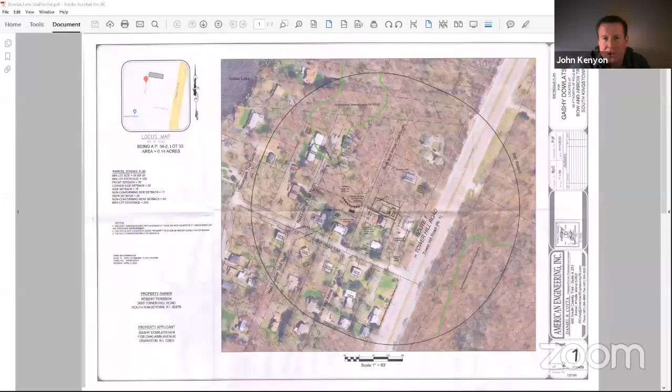It's designated as tax assessors plat 34-2, lot 33. The property is 6,050 square feet in size, and it's in the R20 zoning district. The applicant is proposing a 2-bedroom, single-family residence with an 896 square foot footprint. The proposed house meets all the setback requirements and no dimensional relief is required. The house will be serviced by a proposed OWTS that has been approved by RIDEM. There are no wetlands on the property, but there are some located to the northwest of the lot. The wetlands have been flagged by NRS, and the proposed OWTS will be located to the rear of the property, approximately 115 feet from the wetland edge.

We're here tonight for a recommendation under section 504.1 of the zoning ordinance, as the OWTS is within 150 feet of the wetland, requiring a special use permit. The proposal meets all the requirements under section 504, including the lot coverage requirement of 15%, and the drainage has been designed for the 25-year storm. Patrick Freeman from American Engineering is here tonight; he prepared the plans. I'm going to have him go over the existing conditions and the proposed OWTS. Thank you, John. Mr. Freeman is just coming in.

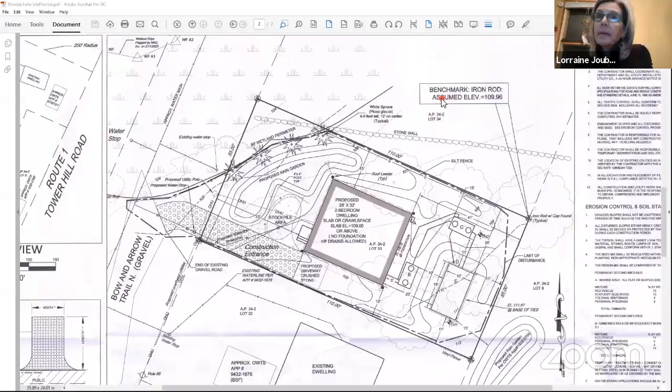It obviously would be up to Gashy. If he wanted to put a fence up, he could, if that's what you want. I think the posts are sufficient if they're very clear and there's also a sign with it. Okay, but maybe the other members have a comment on that.

One comment: I didn't see any test pit locations. What sort of statistics did you get from the pits? Where are we with the water table? That's something else I would like to see.

Sure. Test hole 1, do I still have the cursor? The test hole 1 is right here. That's the symbol that we use for the test holes. Test hole 2 is in that location. If you scroll down, we have the test hole and percolation data just below the scale. So test hole 1, we got a seasonal high water table at 19 inches. Test hole 2 was a seasonal high water table at 18 inches. Okay.

And are you planning on having the driveway be pervious? And if so... Okay. Yep.

Does anyone have any further questions of the applicant?

Just one other question about the erosion sediment control plan. According to the current stormwater erosion control manual, as well as the DEM stormwater standards, the infiltration areas such as the BSF and rain garden should be protected from construction. Does your erosion control plan specify protecting those areas by fencing before construction begins?

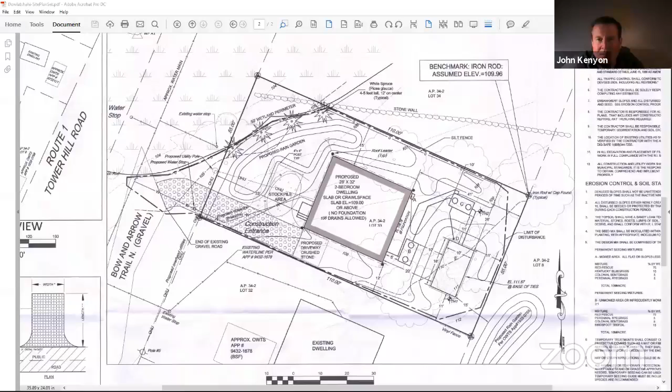It seems that so far we haven't really addressed one of the key issues of the flooding that occurs where a car could get stuck, either going to or coming from the new dwelling. Patrick, can you suggest any solutions to that? I can envision a scenario where an emergency vehicle has to visit the house and treat someone and they can't get there or can't get out. Sure, the crushed stone driveway we're proposing wouldn't pose that issue.

As far as the end of Bow and Arrow Trail being impassable, I wouldn't think that based on what we have, I don't have any evidence it would be impassable. Even though it's flooded to the water stop? I'm sorry? Even though it's flooded to the water stop? Well, I'm not sure which water stop we're talking about, the one in the 50-foot perimeter wetland or the one in front of the Bissett's lot.

I'd have to double check, I don't have an answer for that. The only thing we could do is improve the gravel of Bow and Arrow Trail to meet a standard where it won't be a flooding hazard.

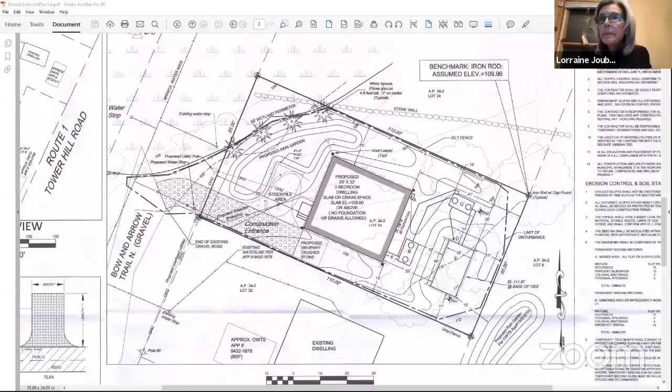Any thoughts? Yeah, John and Jane, does the existing gravel end perpendicularly to the road, or is it almost a diagonal?

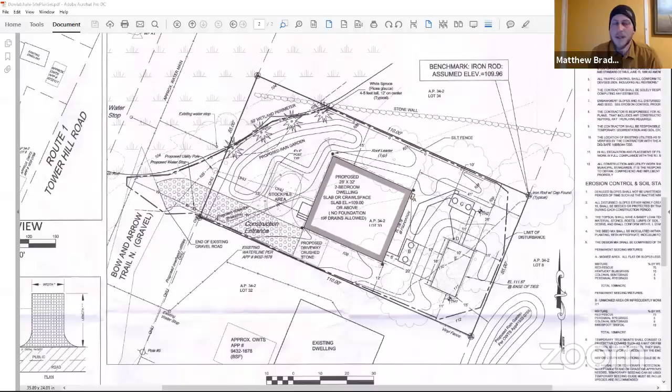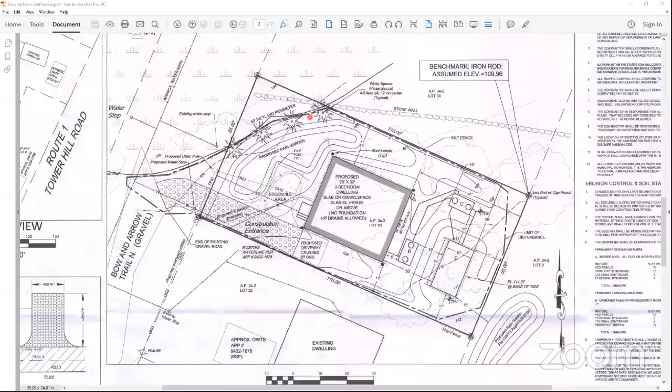It is kind of a diagonal at the water stop. I did send a couple of pictures to Mr. Parker, titled flooding 1 and flooding 2 or something, for Bow and Arrow Trail North, and it pretty much shows what happens.

So right where you see the little sign on the right in the light pole, that's where our water stop is, and you can see that the gravel pretty much ends right there. And the property line is actually past that forked tree on the right.

I think there's another one that shows a little bit more of a close-up, it's runoff 2. You can see that it's not only flooded by the runoff coming down the trail, but also it's pretty wet off to the right coming off lot 33.

That's where everybody gets stuck. One fella came down with a box truck because he was following his GPS - it reminded me of a Seinfeld episode - it told him to go straight into the swamp, and that's what he did. He had to be towed out. Like I said, the guy doing the surveying was parked right there, and he had to be towed out too. It wasn't even raining at the time.

It just gets really soaked. It's fine in the summertime, but not during the other six months. So I just think the picture tells a story. You can see where the end of the gravel is, which is adjacent to the water stop.

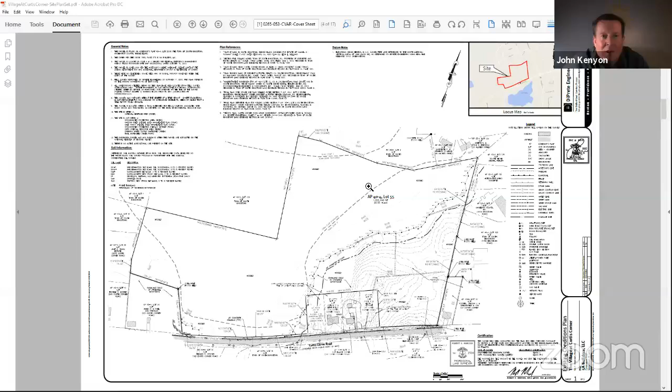There'd be one affordable unit in each of the 8 two-family dwellings. The concept is for a young couple with a family that could buy the two-family, live in one of the units, and then rent one of the other units as affordable.

We appeared before you last year during the master plan stage of review, and you didn't provide a recommendation because at the time you didn't feel there was sufficient information to give a recommendation on. We did receive master plan approval in March of last year.

Under the subdivision process, after we receive master plan approval, we then apply to the state for all necessary approvals, and then we have a preliminary plan public hearing with the planning board. We've had one hearing so far. They requested that we come back to you since we have more detailed engineering along with the landscaping plans.

We've also filed for the necessary state approvals. They're very close to receiving those, and not much has changed as far as the design since the master plan. Eric Prive from DiPrete Engineering is the project engineer. I'm going to have him briefly go over the existing conditions, the changes from the master plan, and where we are with the state permitting.

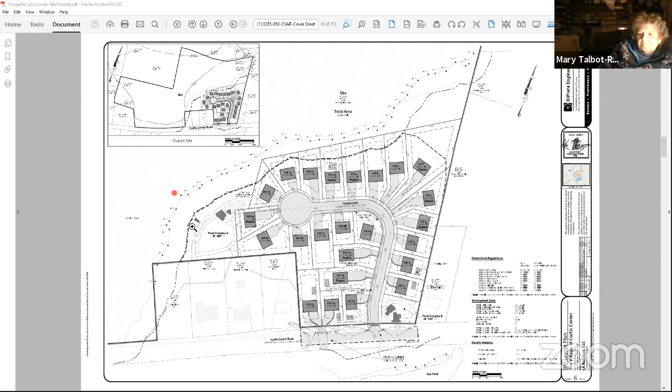Unfortunately, Eric has to be at another public hearing in another town, so he's going to talk really fast. I won't go too fast. First of all, can everybody hear me okay? Yep, thank you. For the record, Eric Prive, P-R-I-V as in Victor E, a registered professional engineer with DiPrete Engineering.

To give you a quick overview, not much has changed from master plan. What we were able to do, one of the things we looked at during the public hearing process, was that one of the abutters located just to the east had some concerns about drainage. So we increased this area in the front from the original master plan. The master plan had a smaller area coming to this front area for infiltrating groundwater.

So we actually were able to shift the units up a little bit. We shifted them all up to the north here, and we were able to create a larger area up here to be able to treat that stormwater.

Also, there's an existing catch basin located right here in Curtis Corner Road, and that catch basin actually just goes to a flared end that comes into a roadside ditch here. There's no treatment, it just goes from the catch basin into the roadside ditch. So as part of our development, we're able to take that, and we have the roadside ditch here, but then it actually now overflows and comes in and gets treated within our water quality area over here. We have a sand filter located right here in the front.

So it's a stormwater sand filter, not the bottomless sand filter like the septic system you were talking about, just the sand filter for stormwater in the front. So we're actually treating a portion of the roadway that is not currently being treated today. It was just direct discharge into this roadside swale here as well.

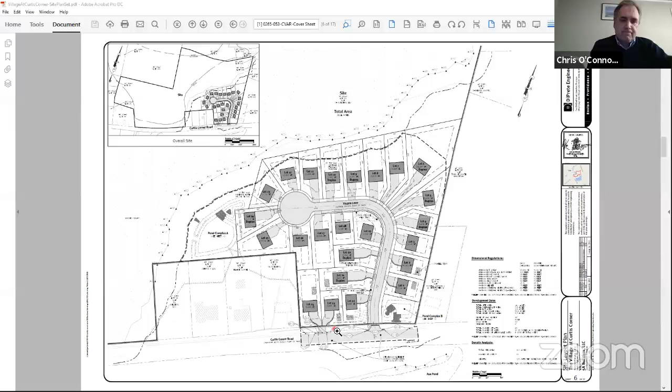Eric, is there a requirement for protection of upland open space in this zoning district? Because it seems awfully dense for the amount of development on a relatively small area of suitable land. So, no, there is not, but because it is a comprehensive permit, we had laid these out back at master plan, each lot size and the relief needed. What we did was take the town's comprehensive plan and the underlying densities. This area is known as medium high density, which allows 4.35 per acre.

So that's effectively a 10,000 square foot lot. We took only the upland area, so there's 7.4 acres of upland, and that's what the density was driven off of—staying within the town's comprehensive plan and restructuring it for density purposes. There are some areas for stormwater measures, but we only used the upland area. That's not a requirement of the density, but that's what we used to come across. It'd be difficult to build in the wetland.

My second thought is that there is no indication that any type of innovative low impact development is occurring in terms of design and the extent of pavement. The driveways are extremely wide—the guidelines are 9 feet wide with a broadening as you approach the house, not immediately. The cul-de-sac doesn't look like it's going to have vegetation in the middle, and that's a pretty large cul-de-sac. It could be vegetated. There could be shared driveways, particularly lot 24 and 23, where for safety concerns it narrows to one, but it's still two very large, very wide driveways. Lots 20 and 21, and many others, are almost all excessively wide. Is there any effort to reduce impervious cover?

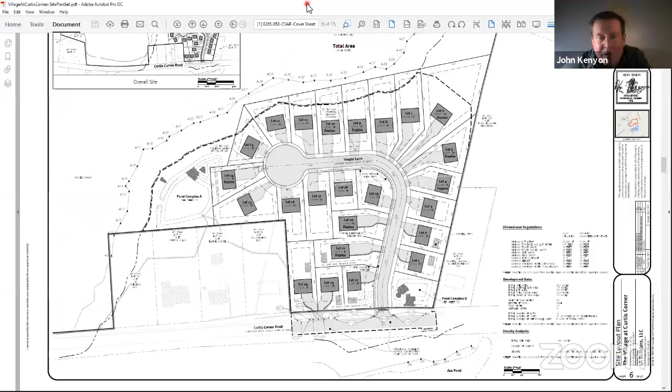Well, I'd note that the concept behind this is being close to the core of town—there are recreational areas you can walk to. I'd agree if we were on the outskirts with a larger parcel, but the town needs affordable housing, and this is one of the few lots in town that works for this type of development. There's not many left like this. If we start reducing the number of lots, we're reducing the affordable housing, and that's the whole concept with this development.

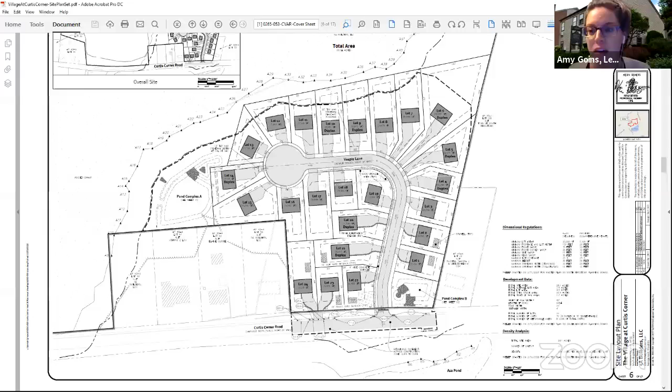This is Amy Goins. May I jump in? Hi everyone, I'm sorry I haven't met some of you in person. I think this is actually my first Conservation Commission meeting, so I've been listening. I just want to jump in on this one question of density.

This is an advisory opinion to the planning board. We're at the preliminary plan stage now. That means they're vested for density, right? The density vesting occurs at the master plan stage. Doesn't mean it's set in stone forever, but it means that the approved density is what will govern going forward unless the engineering produced at the subsequent plan review stage shows that the land can't support the approved density.

So I would encourage you in your discussion and your recommendation to the planning board to consider that. And if you have recommendations on conditions that will mitigate the impact of the approved vested density, you should certainly feel free to propose those. But I want to caution you against that, and I've provided this advice to the planning board as well. You know, master plan density, that ship has sailed for the most part.

Thank you. This is an advisory. Go ahead, sorry.

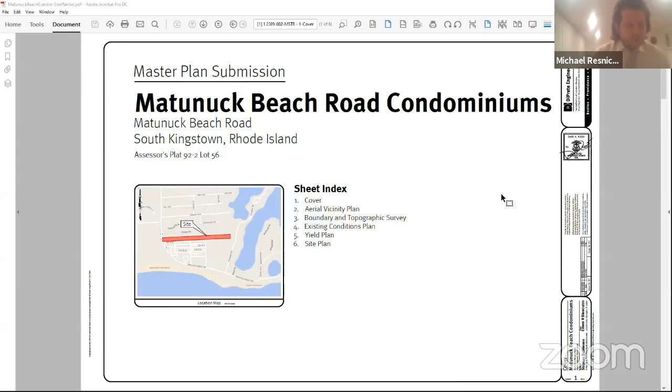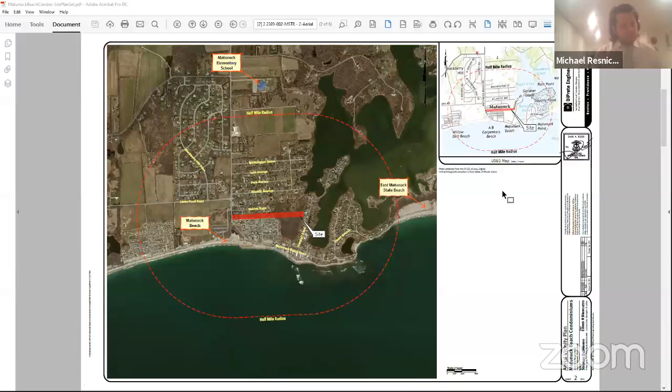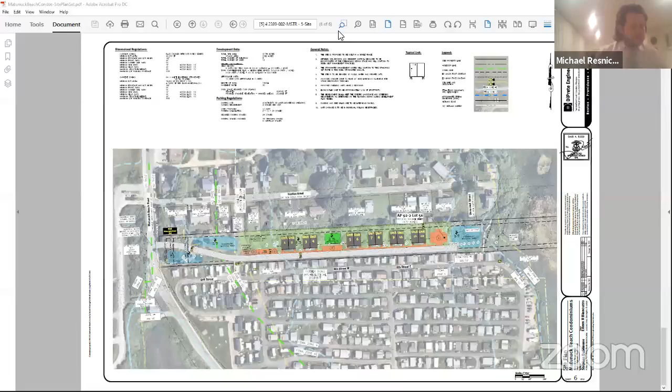The property is located at Matunuck Beach Road, plat 92-2, lot 56. The parcel is 4.77 acres, and it's in a mixed zone, CN and R20. By way of background, we have completed our pre-application concept review before the Planning Board and the Tech Review Committee, and we are presently before the Planning Board on our conceptual master plan review. We have had two lengthy hearings before the board on this present application.

I would estimate anywhere between 7 to 8 hours of public comment, question and answering, and presentation before the board, and we are presently scheduled for a meeting before the planning board on January 7th of this week. The commission is aware we still have before us our application for a preliminary plan and also final plan. I'd remind the commission that, like the previous applicant and presentation, this is a comprehensive permit pursuant to state law for low to medium income housing. The proposal right now is a 12-unit residential condominium complex in the form of 6 duplex structures, as depicted on the site plan in front of you. Access is proposed via private driveway with the parcel's lot frontage located on Matunuck Beach Road.

As Mr. Duhamel will discuss with you, we've proposed to manage the stormwater through the installation of various features on the eastern and western portion of the site. The development is proposed to be serviced by public water, and originally it was to be a single community on-site wastewater treatment system to serve these 12 units. However, based on commentary from the planning board as well as the public, that's been changed to 6 units, 1 unit to serve each of the structures. And again, this is a comprehensive permit application, so 25% of these units, 3 units, will be deed restricted as low to moderate income housing.

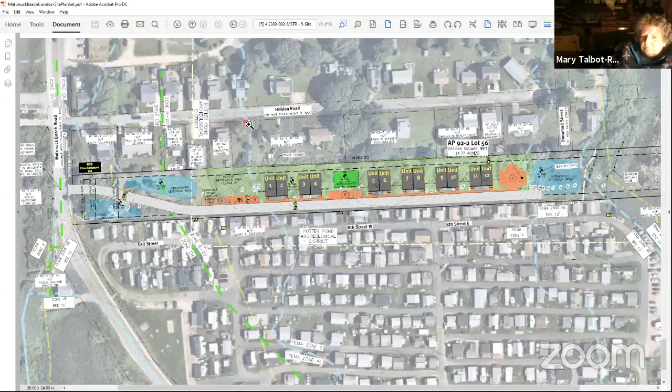We've been successful with pervious pavement in commercial and residential applications. In this coastal application, we were concerned with sand flying everywhere, so you would have much more maintenance of sweeping and vacuuming the sand. That's why we felt an impervious road with open concrete pavers would be the best use within this area. Having a full gravel road, I think, is more maintenance and more difficult to maneuver in.

It's only 20 feet wide, so having full access of that 20 feet is more guaranteed with pervious pavement. Impervious - well, yeah, it's overall impervious. Right, I don't know if I answered your question. I'm not sure, thank you.

Are there any particular restrictions with it being in the Potter Pond Archaeological District? Are there any restrictions posed on the project? Which district? It looks like it's in the Potter Pond Archaeological District - does that impose any limitations on your development? We submitted to Rhode Island HPHC, Historic Preservation, and they found no historic reason to prohibit construction.

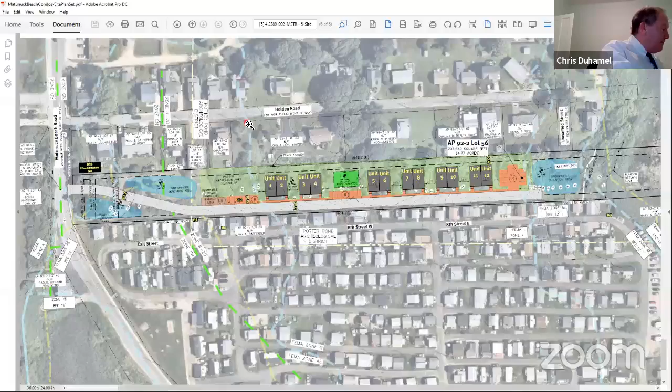And with that, it's more conducive to an individual sewage disposal system. It's a condominium, an association - it would still have one entity responsible for oversight and maintenance of all the units, even though there'll be 6 instead of 1. So that high level of scrutiny or maintenance will still exist, but it allows for about 100 feet less road and the parking reconfigured, giving greater separation to the wetlands and less disturbance. It also meets a concern raised by the planning board about what happens if one system were to fail - we'll have limited that.

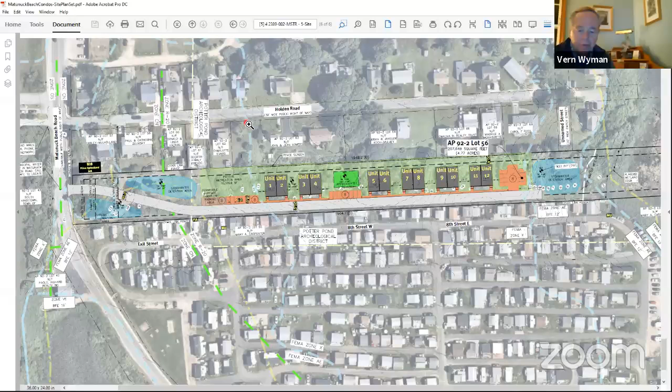Would it also modestly limit the proximity of the outermost units to that flood margin showing there? Well, we're pulling it away from the east side for a better separation, so certainly within that area, yes.

Jay, is there anybody else present with a hand raised? No, there is currently one attendee, Tori DeSimone. Tori, if you have anything you would like to share or say, please raise your hand. We'll allow you to speak.

I think that's Steve DeSimone. I believe that's Stephen, yeah. But Stephen was logged in already. Okay, yeah, Stephen's logged in. I am logged in. That's my mother.

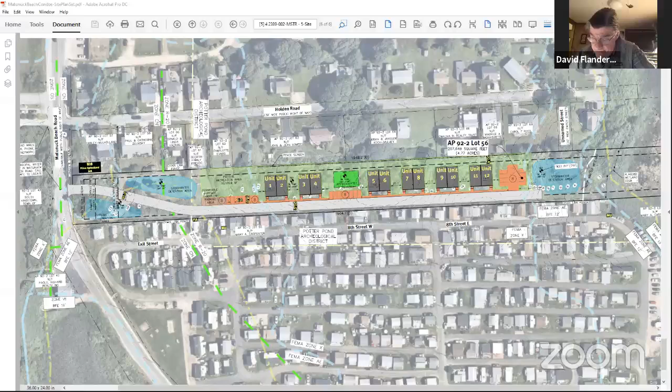So no, I do not believe there's anyone else in the public that wishes to speak at this time. Does anybody else on the commission have any further questions with the applicant?

If not, I'd entertain a motion for the recommendation to the planning board. I'll make a motion for a recommendation. It appears that the applicant has taken into account the planning board's concerns and reconfigured the subdivision to address those issues, including using 2 separate OWTS drain fields rather than 1 - pardon me, 6 of them, 1 for every 2 units. Although we really don't know the exact placement yet.

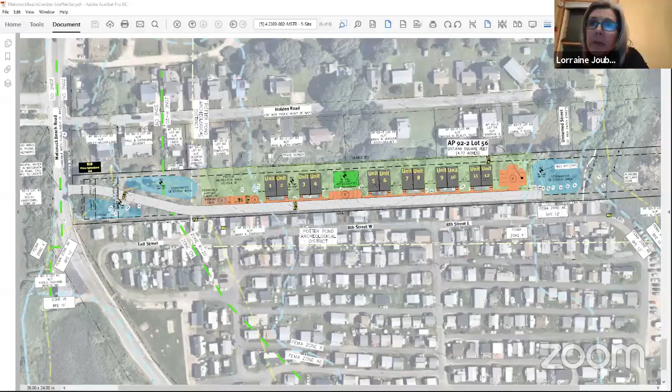In terms of stormwater management, given the permeable soils, there are no issues with infiltrating most of the runoff. The primary concern appears to be potential flooding, with more frequent and more severe floods, especially in terms of leaving the site in an emergency. So it would be useful if the applicant could evaluate the scenarios developed in different mapping programs out there to evaluate what the future flooding could be over the next 30 years at least.

Lorraine has made a motion. Do I hear a second? I'll second that motion. Vern Wyman has seconded. Any final discussion before we vote? Okay, I'd ask that everybody in favor say aye. Aye. Aye. Aye. Any opposed? The motion passes. Thanks very much.